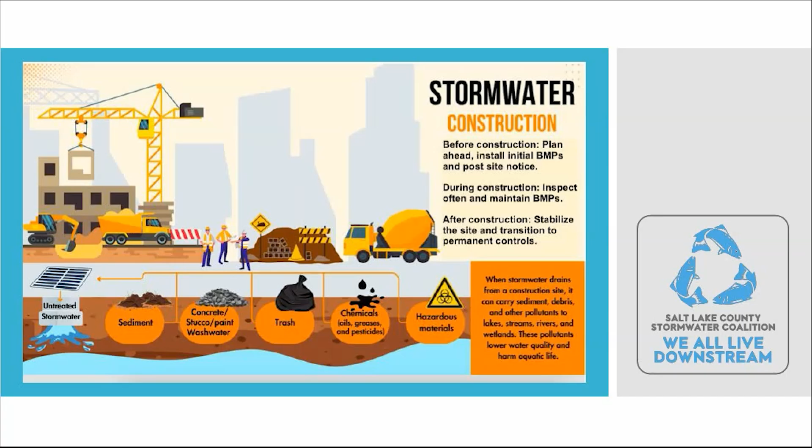It is really true that construction impacts water quality to a much higher degree than regular land uses and land development. So it is a really important topic. There are 3 phases of construction: pre-construction, during, and post-construction. I'm here today to talk about pre and post. But the first step, I would say, in understanding how to develop a property in a way that doesn't harm stormwater quality and receiving water resources is to do your proper planning and documentation.

So I put it at the bottom, but for pre-construction, a site reconnaissance is really important, but it's also, of course, most important to know your site's planning. So some engineer and architect has designed a site, and you have to understand what they've designed, how can that actually be constructed on the property that you've chosen to do that on. So I put it at the bottom, but really it's at the top.

So really understanding the dynamics of that site will help you do a good job of preventing pollution, and that is the goal here. So the important things to consider are things like soils on the site, the vegetation on the site. These impact the erosivity of the water and then the ability to phase your project in a way that minimizes disturbance. Slopes also come into play because of the impact of runoff running down slopes, but also it just changes how you're managing the site.

There are sensitive areas such as vegetative buffers along riparian corridors. There's infiltration galleries. There's wetlands. All these things need to be protected during construction and development. So understanding where they are and knowing how to control pollution from entering those sources is really important. Understanding your groundwater is also very important because a high groundwater table means you're probably going to need to end up dewatering. So we'll get to that here in a second.

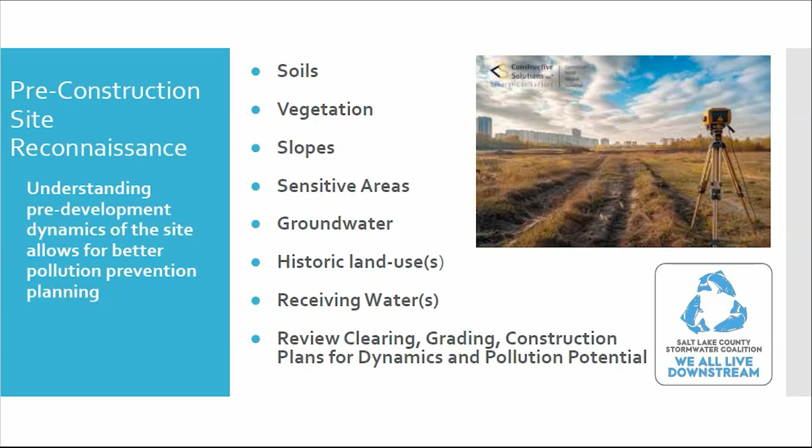Here in Utah, we have a pollution discharge elimination system that requires people to get a stormwater permit if you meet certain thresholds of development and disturbance. Those are broken down mainly by the size of the disturbance. There's a general permit, and then there's a common plan permit. In the general permit, if it's an acre or more of disturbance, then you need a permit. If it's part of a common plan of development that's going to disturb at least an acre, then it also needs that permit, even if it is less than an acre.

But there's another permit that can be useful if you're building homes that are an acre or less in disturbance, but they are part of a large development plan. So you have to get coverage for those, and then there's requirements from those permits that dictate how the site can be developed. The secondary issue would be dewatering.

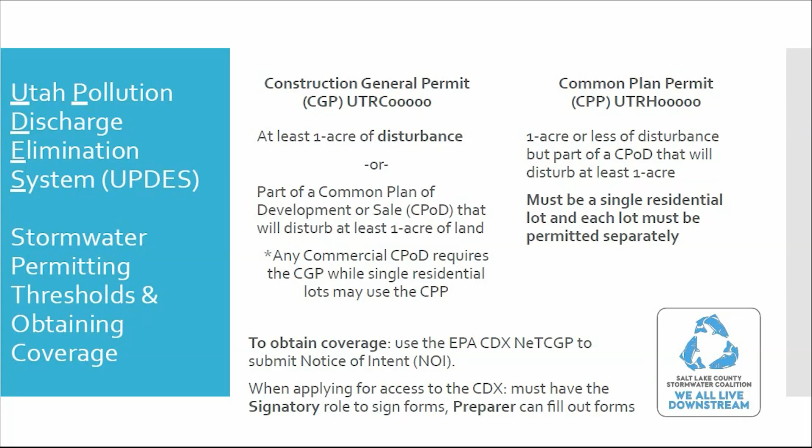I mentioned if you have a high groundwater table, there is a permit for that. There's a series of permits. I won't go over them right now, but just understand that they are required if they're being discharged, because those dewatering impacts can be pretty substantial to the receiving waters.

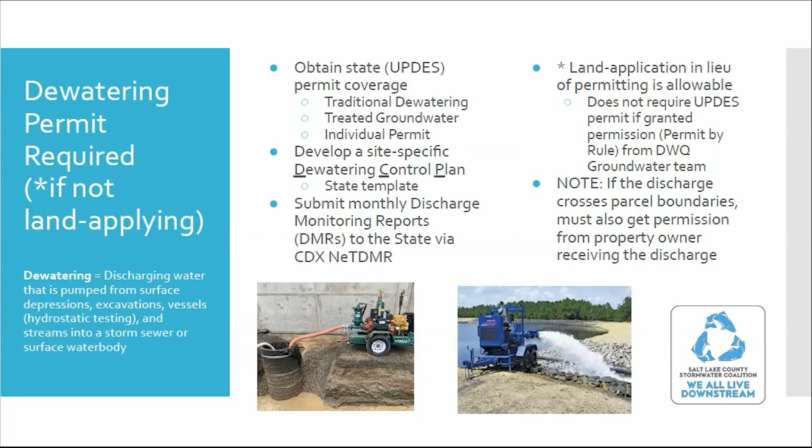By virtue of having a permit, you are required to develop a stormwater pollution prevention plan, also known as a SWPPP. It's required for both kinds of permits, but there are some differences. There is a template that was created by the state that we can use that can help guide the development of a SWPPP, so it meets all the requirements of those permits. It's really easy to follow.

And there's also an evaluation form that was created that can help people determine whether or not the SWPPP that's been developed for them or created by them is in compliance with those permits. It's very useful. We have a little snapshot of it here that we'll go over at another time. But the important thing to remember is that the SWPPP is a living document. It is expected to change over time as things go on.

It will include things like who's doing what on the property, if there's a SWPPP team, the nature of the activity that's going on, the quality of the water, the receiving water from the site. These are all important considerations. The methods by which people will prevent pollution during construction, the stabilization requirements in terms of vegetative or non-vegetative cover, who's going to respond to a spill and what are they going to do when they respond. All of this is really essential to sticking to a plan that will prevent pollution during construction. Permit coverages and delegations of authority, these are all developed in the SWPPP.

And let's see, I think I am running low on time, it would seem.

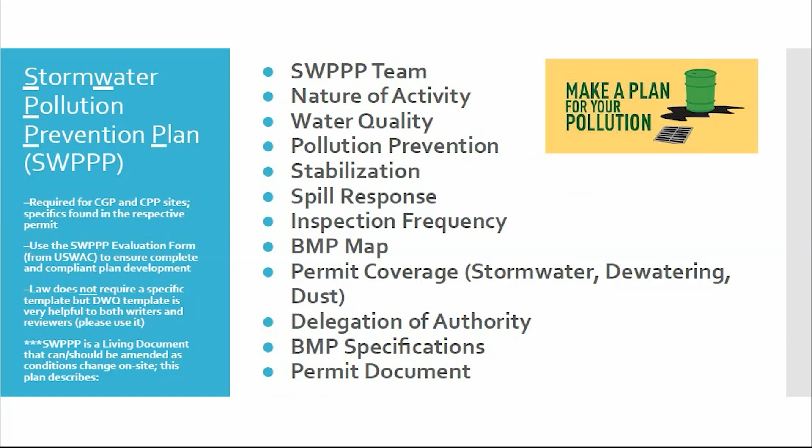Okay, sorry about that. Well, just know that when a site is ready to begin construction, it's essential that they have a pre-construction meeting. The permittee has a pre-construction meeting with either the MS4, the city, the county, whoever is regulating their site, and they'll go over the complexities of the site and make sure that the site's ready. They'll also look at the BMPs that were installed. BMPs are best management practices. These are things used to control erosion and sediment and pollution, and that will be confirmed.

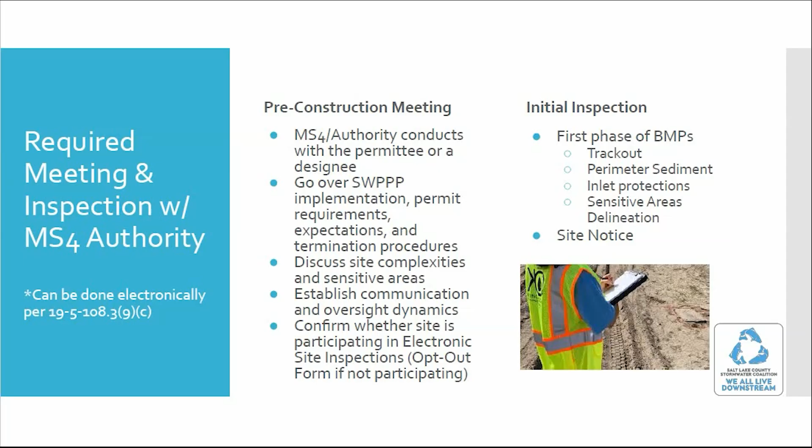And once approved, the project can begin working, and it's up to the contractor to know all the specifics of their own plan and their own permitting so that they can get the job done in a way that protects water quality. So with that, I trade off to Hank Tolman with the Accena Group. Awesome. All right. Thank you.

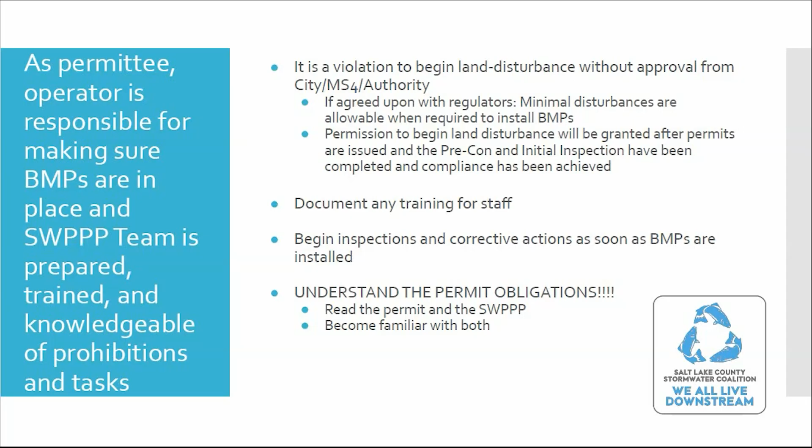Yeah, so Matthew talked about everything that we want to do before we actually get started on construction. I'm going to talk about what we're going to do once we start construction, a little bit beforehand too. Probably the most important thing that we want to do when we're talking about construction is implement the right best management practices. So best management practices are the controls that are going to stop pollutants from running off your sites, stop pollutants from leaving, and controlling those, maintaining them on site, making sure that they're cleaned up before they get into our water bodies.

I made a list of some of the most common BMPs. This isn't a comprehensive list, but these are some of the ones that are most common for us. Also, I wanted to mention that USWAC, and Matthew brought this up to me before the presentation, has developed a new BMP manual, which is a great starting point for you if you're looking at what BMPs to use, and also if you're looking for specifications that need to be in your SWPPP document. Go look there for that manual. It's going to be on the USWAC website, and you can get specifications for these best management practices.

So a couple of the ones that we have here, we have perimeter controls, lots of different types here, and you're going to want to choose them. We're not going to get into all of that today. I'm more than happy to talk to you at length, ad nauseam, about what BMPs you should use and at what times, but you want to choose the BMPs that are going to work best for your site. You want to choose perimeter controls. Perimeter controls are designed to stop pollutants from leaving the site. So if you're implementing perimeter controls where no stormwater or no pollutants are ever going to leave the site, like at the top of a slope, you're probably wasting money.

And you may even be polluting, because something like a silt fence is going to degrade and it's going to fall apart, and then that's going to be a pollutant on your site, right? So you want to make sure that you're using them correctly.

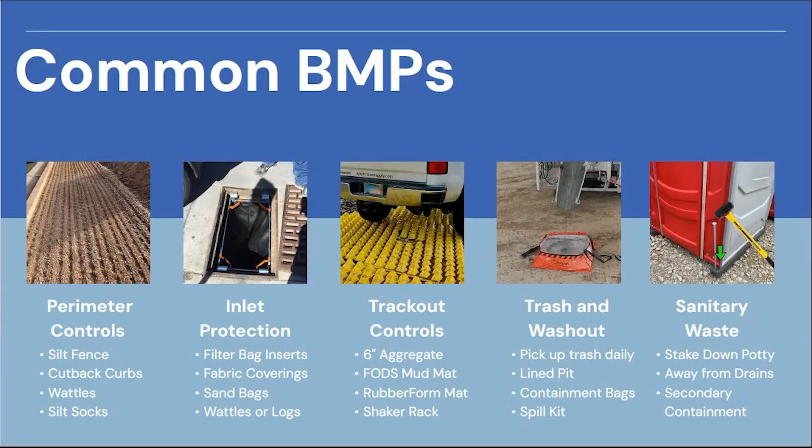Like I said, please check out the manual on the USWAC website. And then there's lots of resources for how to select the appropriate BMPs. But we want to use the right ones for the right thing on your site. Okay, there's lots of options, but what is right for your project based on what's happening on your project?

All right, let's talk about inspections. Huge confusion. I always get so many questions about this. Just last week, I had somebody ask me, hey, the city's mad because we don't have any inspections. They want inspection reports, but the city comes out every month and does the inspection.

I don't understand. Why aren't, you know, they have the inspection report. They're the ones doing the inspection. Okay, all right. So there are separate inspection requirements. The contractor and developer, the site owner, has the responsibility to conduct what we call self-monitoring inspections during the construction process. Those self-monitoring inspections are required either weekly or bi-weekly, depending on your site and depending on your choice.

Weekly, once every 7 days, or once every 14 days and after a rain event of a ½ inch or enough snow melt to cause runoff, to cause a discharge. Or if you're next to an impaired water body, then you really don't have a choice. If the nearest receiving water to you is impaired, which is again something that we run into all the time. If you're preparing your own SWPPPs, if you're trying to go through the documentation, you've got to look up what your actual receiving water body is.

Can't tell you how many times I look at SWPPPs in Utah County, and Utah Lake is the receiving water. No matter where they are in Utah County, it's always Utah Lake. Well, that's great, but Utah Lake is impaired, so it doesn't matter. You're going to be doing the extra inspections. But it's not always Utah Lake. It's not always the Great Salt Lake. It's not always the Jordan River. There's lots of water bodies you need to look out for. If it's impaired, then you have an increased inspection frequency.

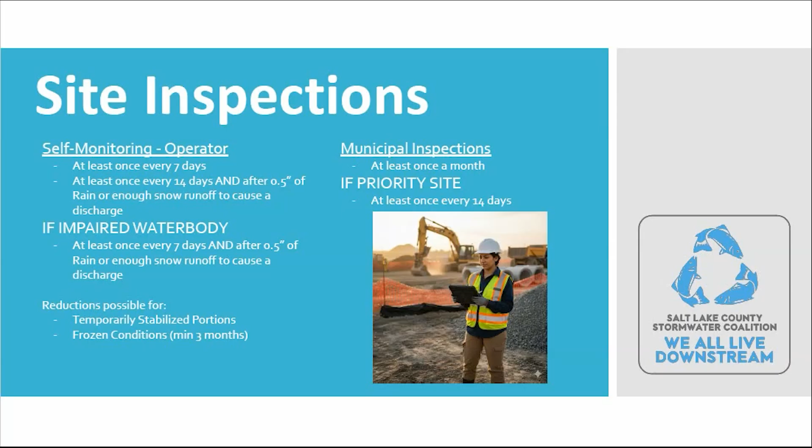So why? The municipalities operate under a different permit. The municipalities aren't operating under the construction general permit. They're doing oversight on the construction general permit, but they have their own requirements under a separate permit that they have to adhere to. Those require them to go out to every construction site and conduct an oversight inspection at least once a month, and then if that site has been designated as a priority site, then twice a month, right, every 14 days.

All right, what about electronic site inspections? Maybe you've heard of these or maybe you haven't. This is kind of a new thing this year, but there is an option for you to provide electronic site inspections. The state has a great list. It's on the USWAC website as well, a great list of what is the expectation for these electronic site inspections. And then you'll be able to submit that to the municipality and they can use that as their oversight inspection. But it needs to meet the requirements, the specifications that they have to adhere to. Otherwise, it's not going to work and they're going to still need to come out to your site.

All right, overall site compliance. Here's some common violations. I'm going to skip through real quick because I'm out of time, but you can look at that later on. These are common violations that we see. All right, and I'll turn it back over to Matt for post. Thank you, Hank.

So obviously, pre and during construction are essential, but at the end of your project, you want to get the job done and move on. The way to do that is to first stabilize your site because it was disturbed when all the vegetation was removed, and now we need to get back to a functional, non-discharging state. And the way we do that is primarily vegetation, but it also can be non-vegetative measures. Because these permits dictate how you're supposed to approach controlling these sites, you do have to stick to their rules regarding what constitutes stabilization.

For anything that's vegetated, it has to be uniform, so that's 100% coverage, perennial vegetation with at least 70% density. And that just means no bare areas. If you're looking at a site and you generally don't see any bare areas, you're probably doing pretty well, but there's something called a hula hoop method where you can toss out a hula hoop, see where it lands, anywhere on the property, and you should be able to see full coverage and at least 70% density. Now, there are exceptions to this. In your arid, semi-arid, and drought-stricken areas, the permit allows for differences to that.

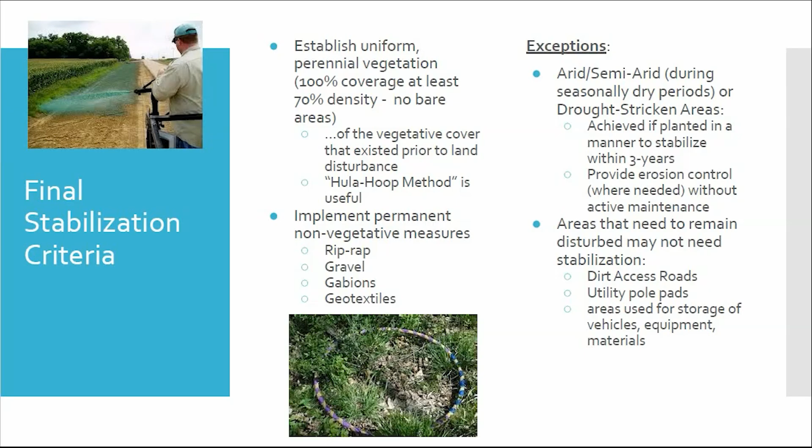So there are areas that may not have to be vegetated or covered, and that's things like dirt access roads or utility pole pads. Again, these are allowances within the permits to achieve stabilization and terminate your permit. The deadlines are really, there's temporary cessation of activities and there's permanent cessation. So if an area becomes inactive for more than 30 days, it has to be stabilized either temporarily or permanently. That's a requirement of the permit.

But generally, as long as the work is still happening, then there's no need to stabilize until that inactivity reaches 30 days. But at the end of the project, it is going to have to be stabilized. So with inactivity for 30 days or more, you should have initiated stabilization, either the planting or non-vegetative. And then after starting that effort, it has to be done within 30 days. So you have to make sure that you get the site stable. Completing it as soon as practicable is the idea.

And of course, there are exceptions once again if you're in an arid, semi-arid area. So here on the Wasatch Front, we are not generally stuck with these issues, but there are periods of drought that can occur. And when they do, once again, you can install those measures in a way that they will vegetate within 3 years. But sometimes you need to control erosion in those situations.

If it's a flat land, it's generally okay. But the steeper the site, the more potential for erosion exists. So there's a need to use erosion and sediment controls during the vegetative process. But again, if you have a plan for that, you're going to be okay to achieve that stabilization and be able to terminate your permit.

And then, of course, if you're discharging to a sediment or nutrient impaired water body, the exception there is you really have to get this done within 30 days. There's no waiting. You just have to get it done because you want to protect those sensitive water bodies.

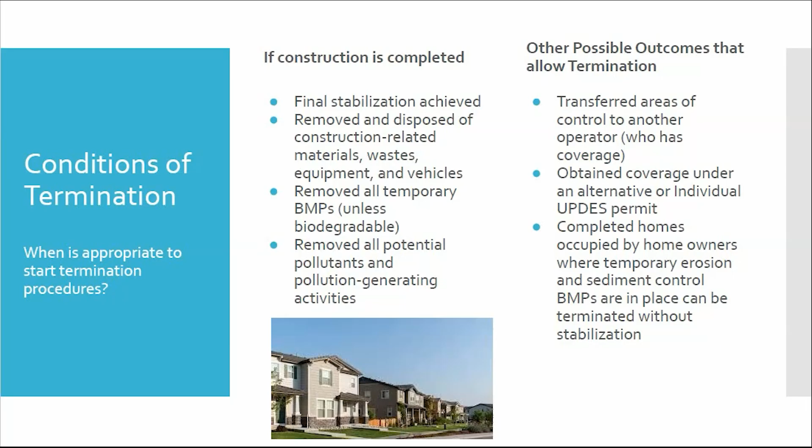And then once you've done that, you submit your form to the state saying that you're terminating. When you do that, it triggers the cities to know that you're ready for termination, and then they can come out and do their final inspection. But it's really important to communicate with your inspectors for the regulatory authority so that you have a conversation about when this is necessary. You will have to terminate your city permits if you have one with the city.

Otherwise, just follow whatever those requirements are. You have to schedule a final inspection. That's where the city's going to come out and confirm what we just talked about, whether or not the site is stable and whether or not it's ready to be closed out.

And then, yeah, that has to be approved. That termination through the central data exchange is the place with which permits are obtained and terminated through the state. That is the last step, where the city will come out and approve that termination. And once that's done, you're ready to go and you can move on with your life.

But the last element of this is that there is a consideration for after construction is completed. There's a lot of research and documentation out there about what happens to a property once it's been developed and how that additional runoff and the quality of that runoff from those properties can affect water quality. So sometimes, depending on the situation during planning and development of the plans for a project, it can be required to use long-term stormwater management BMPs.

Those are things like detention and retention ponds, permeable pavements, bioswales, vegetative buffers, and even treatment devices. These are all things that will help protect water quality after development. And if you've been required to include that in your planning and you've built that, I think your last job is really to make sure that those were installed to plan as expected and required. And this is something that you can show, and somebody should have been inspecting it from the city side.

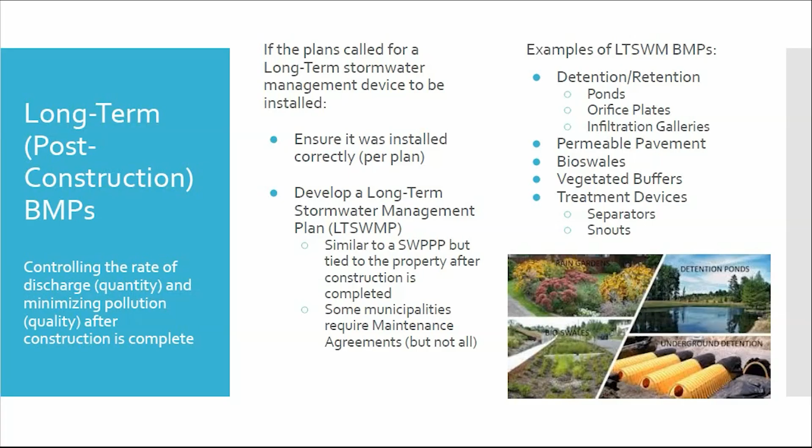That's why it's nice if it's developed early, but it does need to be in place once the property has changed hands. And cities will come out and regulate that. There are fines possible for not maintaining those BMPs, so it's just really essential. And that's really the last step. You know, we've gone through the full arc of construction, so I think the big picture here is that we are protecting water resources by controlling development in a way that minimizes stormwater pollution.

Dawn, did you have final comments? We all live downstream. We all live downstream. That is so true, and I hope we all remember it. And the next time you see a construction site, if you're not sure about what you're seeing, you can go up to their SWPPP sign and look at who is operating that site and who you can talk to about the concerns that you have, because it is public facing. We are interactive and we do have to respond.

And if you see a problem that you can't address through that effort, contact your city, local, state authorities and let them know what you're seeing. And as developers and contractors, if you have any questions about what you're accomplishing or having to deal with on a site, it's really essential to reach out to your authorities to make sure that everybody's on the same page. So we're going to go to Q&A, but if you need more information, there's a QR code to the Stormwater Coalition's page, and it's an incredibly useful resource.

So with that, do we have any questions? Does anybody have any thoughts? Yes, ma'am. Hello, this probably isn't in your wheelhouse exactly, but I haven't succeeded in finding who to ask. But anyway, I live near Wheeler Farm and Little Cottonwood Creek runs through that, and occasionally there's foam on the creek. Who would I call to say there's foam on the creek?

That's a really good question. It's in Murray, right? So Murray City might be a good place to reach out to their stormwater group. But what I'd like to point out is there's such a thing as natural bioturbation that creates natural foaming. That's very common in a lot of places, but especially in our area because we get rain so infrequently. So a lot of times what you're seeing is just the impacts of a rain event that's finally reaching a stream. And as that stream roars downstream and collects in little low points, it can develop a lot of foam. I've seen it a lot. It can be alarming, but a lot of times it's actually natural.